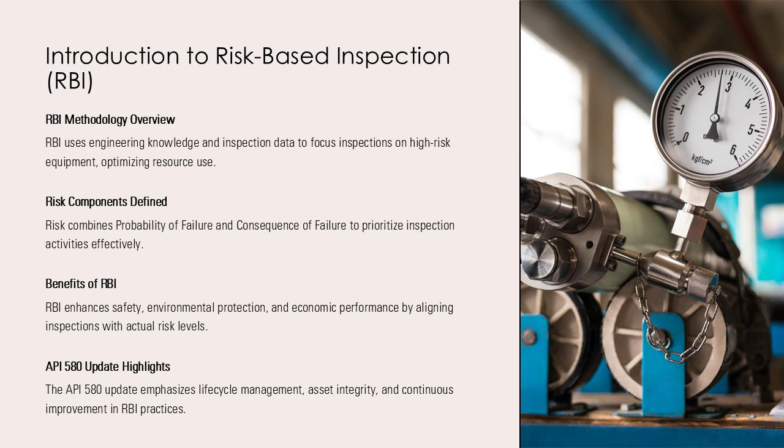This approach represents a significant evolution from traditional inspection philosophies that relied heavily on prescriptive codes and fixed inspection intervals. RBI allows organizations to make informed, defensible decisions that align inspection activities with actual risk levels, improving safety, environmental protection, and economic performance. The API 580 update further emphasizes alignment with asset integrity management systems, lifecycle thinking, and continuous improvement through reassessment as operating conditions, degradation mechanisms, and inspection results change over time.

The primary purpose of risk-based inspection is to provide a rational basis for determining what equipment to inspect, how to inspect it, and when inspections should be performed. RBI shifts the inspection philosophy from a compliance-driven activity to a risk-informed decision-making process. According to API RP 580, RBI aims to reduce the risk of failure to a level that is as low as reasonably practicable, ALARP, while ensuring compliance with regulatory and corporate requirements.

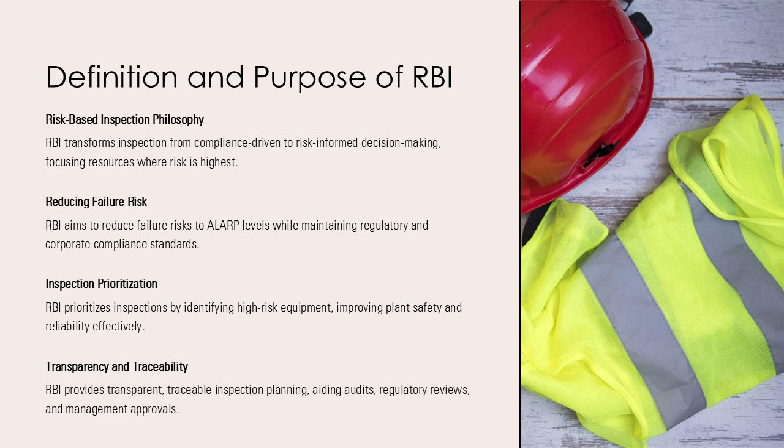The methodology supports prioritization of inspection resources by identifying equipment with higher risk profiles, thereby improving overall plant safety and reliability. RBI also helps extend inspection intervals for low-risk equipment, reducing inspection costs and operational disruptions. Another key purpose of RBI is to provide transparency and traceability in inspection planning decisions, which is particularly important for audits, regulatory reviews, and management approvals. By combining quantitative or qualitative assessments of degradation mechanisms, inspection effectiveness, and consequence modeling, RBI ensures that inspection strategies are technically justified and aligned with actual operational risks.

Traditional time-based inspection approaches, risk-based evolution of inspection intervals. Traditional inspection practices in the process industry have historically relied on time-based or calendar-driven inspection intervals. These approaches are typically dictated by codes, standards, or regulatory requirements that prescribe fixed inspection frequencies regardless of actual equipment condition or service severity. While time-based inspections provide simplicity and regulatory clarity, they often fail to account for variations in operating conditions, material degradation rates, and inspection history.

As a result, equipment with low degradation rates may be over-inspected, leading to unnecessary costs and operational downtime, while high-risk equipment may not receive adequate attention. Time-based inspection also tends to be reactive, identifying issues only after degradation has progressed significantly. API RP 580 recognizes these limitations and positions traditional inspection as a baseline that can be enhanced through RBI methodologies. The evolution away from purely time-based inspection reflects the industry's growing emphasis on reliability, safety performance, and risk management.

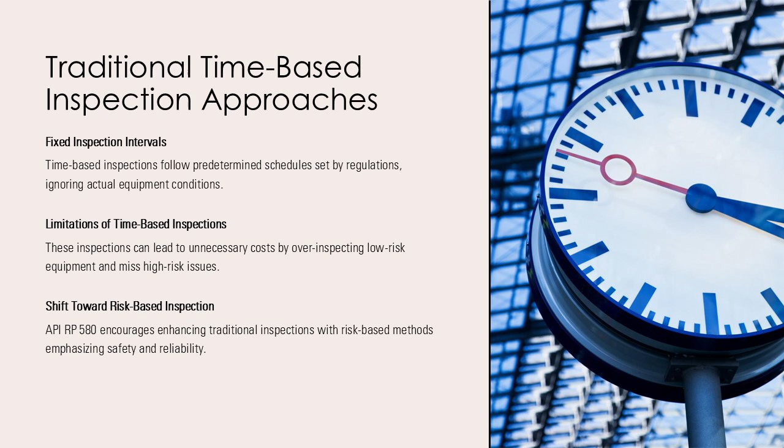Under the risk-based inspection framework, inspection intervals and due dates are determined by evaluating both the probability and consequences of failure rather than relying solely on elapsed time. API RP 580 emphasizes condition-based and risk-informed intervals, where inspection timing is linked to degradation rates, remaining life calculations, and risk acceptance criteria. Equipment with low POF and low COF may qualify for extended inspection intervals, while high-risk equipment is inspected more frequently or subjected to enhanced inspection techniques.

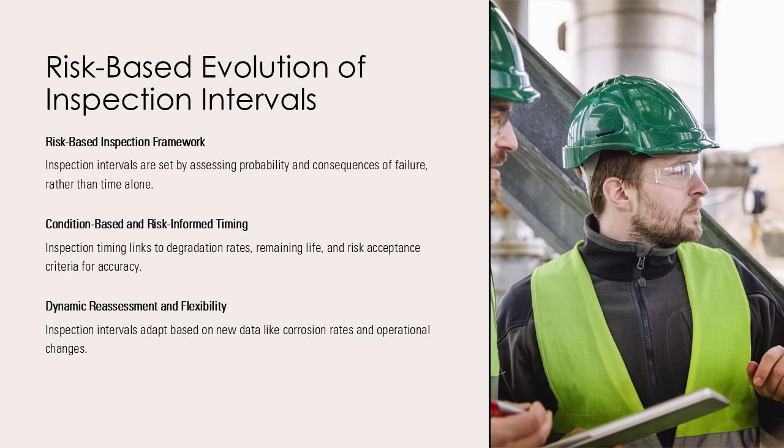This evolution enables more proactive management of equipment integrity by anticipating potential failures before they occur. RBI also supports dynamic reassessment, meaning inspection intervals can be adjusted when new data becomes available, such as updated corrosion rates, changes in operating conditions, or results from advanced inspection methods. This flexible and adaptive approach improves safety margins while optimizing inspection planning and maintenance resources.

Understanding consequence of failure, COF: categories and examples. Consequence of failure, COF, represents the potential impact that could occur if a piece of equipment were to fail and result in a loss of containment.

In API RP 580, COF is evaluated across multiple dimensions, including safety and health impacts, environmental damage, economic loss, and business interruption. Safety consequences may involve injury or fatality to personnel due to fire, explosion, or toxic release. Environmental consequences consider the extent of pollution, contamination, and regulatory penalties. Economic consequences include repair costs, production losses, and reputational damage.

COF can be assessed qualitatively using consequence categories or quantitatively through consequence modeling that estimates affected areas, release rates and escalation scenarios. Understanding COF is critical because it ensures that equipment with potentially severe impacts receives appropriate inspection and risk mitigation, even if the likelihood of failure is relatively low.

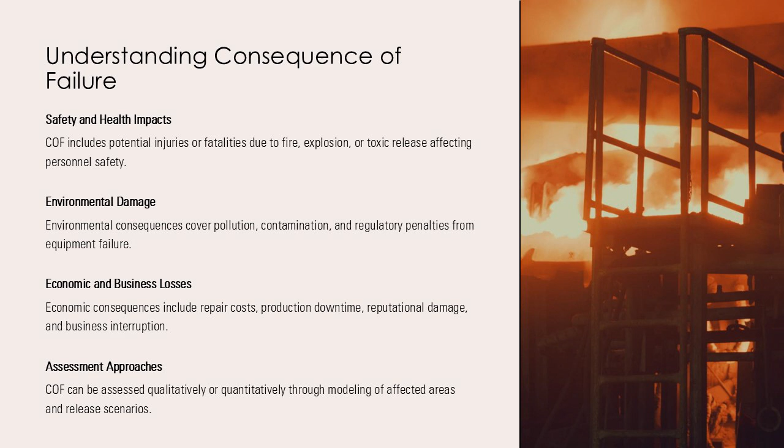API RP 580 categorizes COF into defined consequence levels ranging from low to high, allowing consistent comparison across equipment items. Low COF typically involves minor leaks with negligible safety or environmental impact, while high COF may involve large releases of flammable or toxic materials leading to fire, explosion, or widespread environmental damage.

Examples of high COF scenarios include rupture of high-pressure hydrocarbon piping, failure of vessels containing toxic substances, or catastrophic tank failures. Medium COF scenarios may involve localized leaks that require repair but do not escalate into major incidents. By clearly defining and categorizing COF, RBI practitioners can objectively assess potential impacts and integrate them into risk calculations, ensuring inspection planning reflects not just how likely a failure is, but how severe its consequences could be.

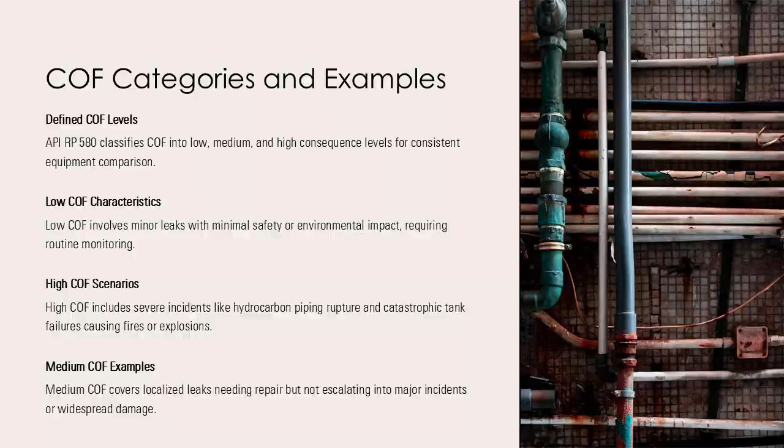Definition and concept of probability of failure, key factors influencing POF.

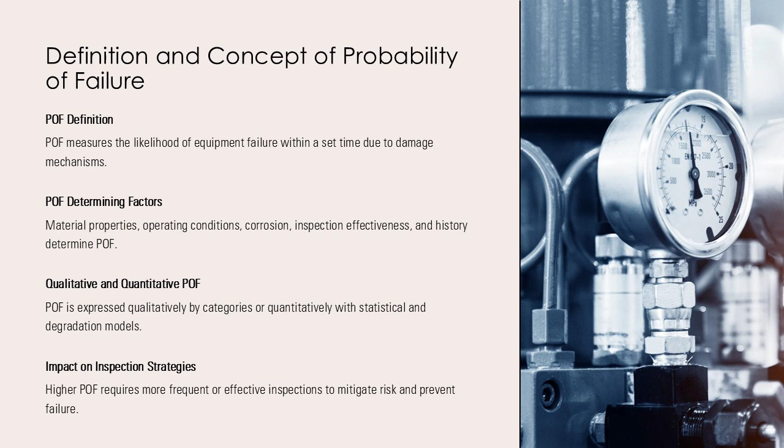Several key factors influence the probability of failure in an RBI assessment. These include the active damage mechanisms such as corrosion, erosion, fatigue, or cracking, the rate at which these mechanisms progress, and the effectiveness of past inspections in detecting degradation. Operating conditions such as temperature, pressure, fluid composition, and process variability also significantly affect POF. Equipment design, material selection, and fabrication quality further contribute to inherent reliability.

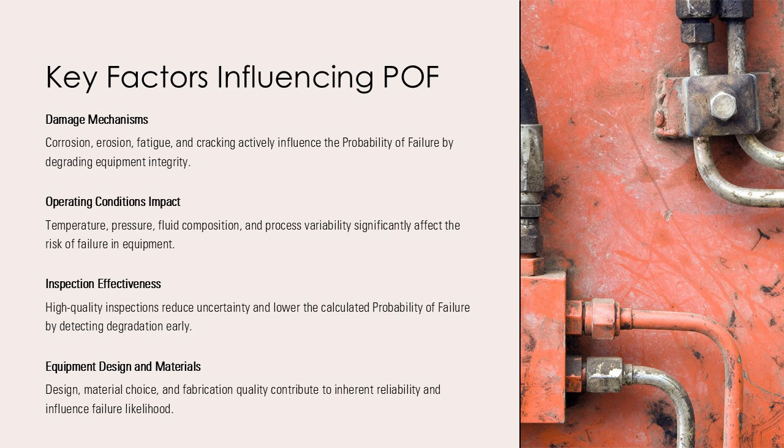API RP 580 emphasizes the importance of inspection effectiveness, recognizing that high-quality inspection methods can significantly reduce uncertainty and lower calculated POF. By systematically evaluating these factors, RBI provides a realistic and defensible estimation of failure likelihood. Risk calculation and risk matrix, benefits and conclusion of RBI implementation.

In risk-based inspection, overall risk is calculated by combining probability of failure and consequence of failure, commonly expressed as risk equals POF times COF. API RP 580 uses risk matrices and iso-risk concepts to visually represent and rank equipment risk levels. These tools allow practitioners to quickly identify high-risk equipment and prioritize inspection and mitigation activities accordingly.

Iso-risk lines represent combinations of POF and COF that result in equal risk, helping define acceptable and unacceptable risk regions. This structured risk visualization supports consistent decision-making, aligns with corporate risk tolerance criteria, and facilitates communication between engineering, operations, and management.

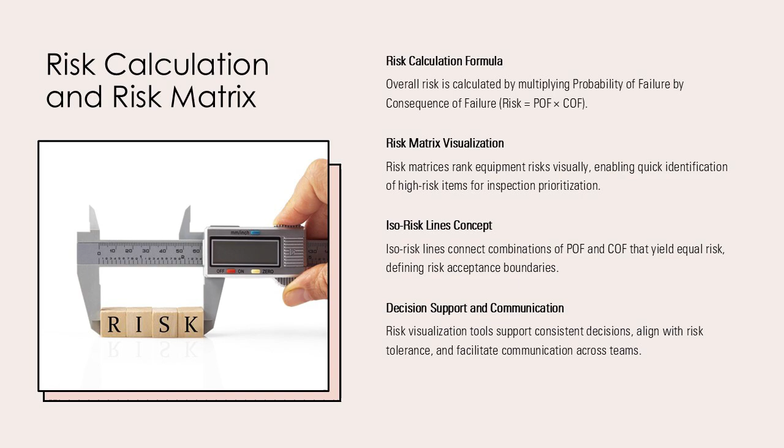The implementation of risk-based inspection in accordance with API RP 580 provides significant benefits to asset owners and operators. RBI improves safety by focusing attention on equipment with the highest risk of failure and most severe consequences. It enhances inspection efficiency by allocating resources where they provide the greatest risk reduction. RBI also supports cost optimization by extending inspection intervals for low-risk equipment without compromising integrity.

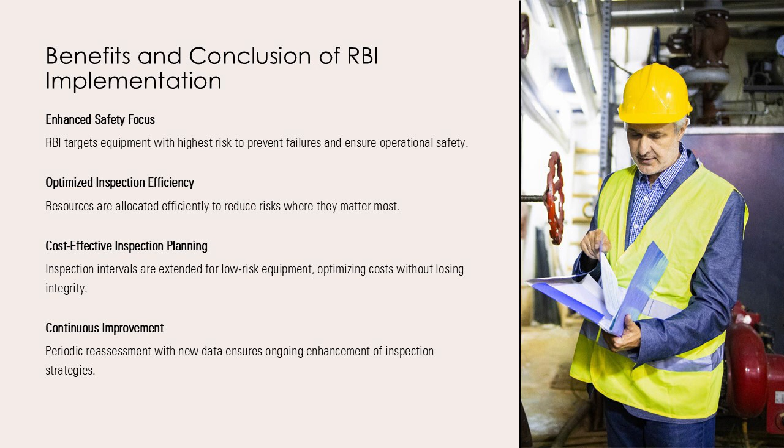Furthermore, RBI promotes continuous improvement through periodic reassessment as new data becomes available. In conclusion, RBI represents a mature, engineering-based approach to inspection planning that integrates POF and COF to support informed, defensible, and effective asset integrity management decisions.